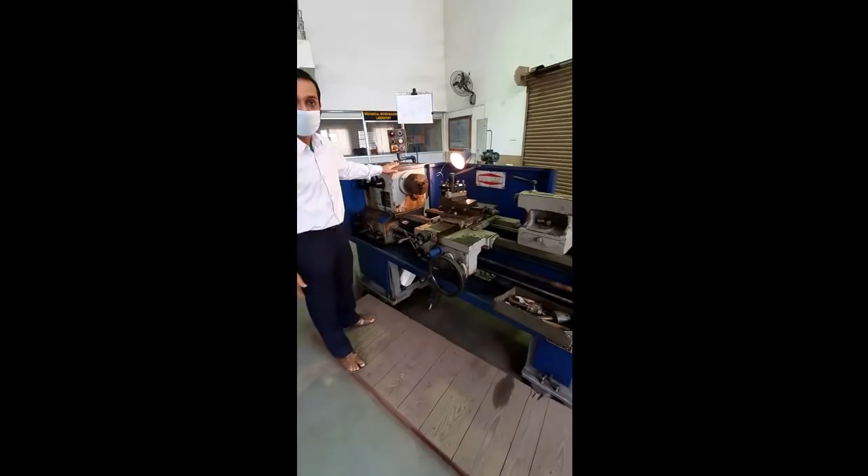Hi everyone, now we come to the introduction of lathe machine. Lathe is a machine tool, and this is what the full lathe machine looks like.

Now this lathe machine has 6 important parts. This whole part is called the headstock. It comprises of some gears and the chuck.

This is the tool post where the tool is mounted, which is used to cut the job. The tool post which has been provided can fix 4 tools at a time. Now you can see 2 tools are being held at this tool post, while the tool post can rotate like this to bring the required tool forward, based on the operation.

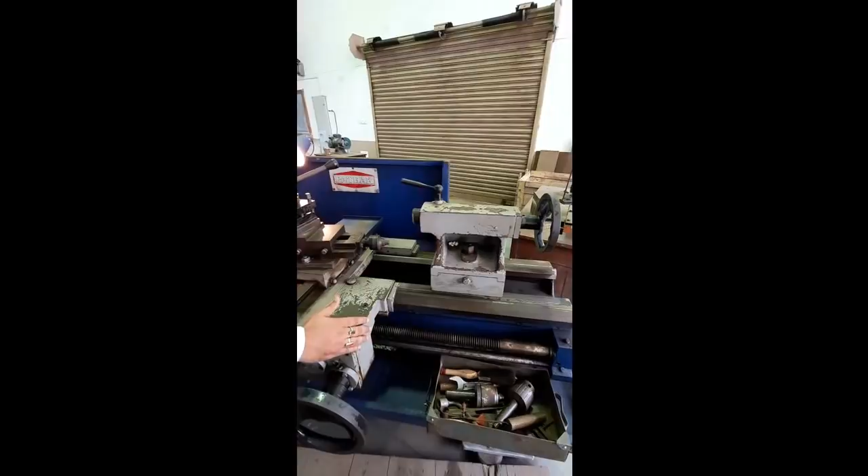Now this is the tailstock, and this is called the carriage. This carriage is used to move the whole assembled tool post and other things forward and reverse. This is the bed of the machine, and here is the feed rod and this is the lead screw. These are the important parts of the lathe machine.

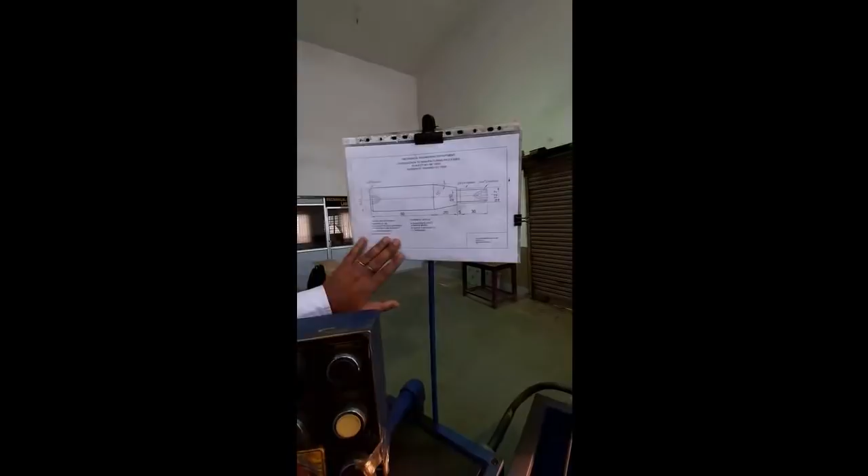Now this is the job which we have to do on this lathe machine. It comprises of facing operation first. The first is facing, then it's centering. Centering means there is a center drill which is used to drill the face. Then turning means removal of the material through the upper surface.

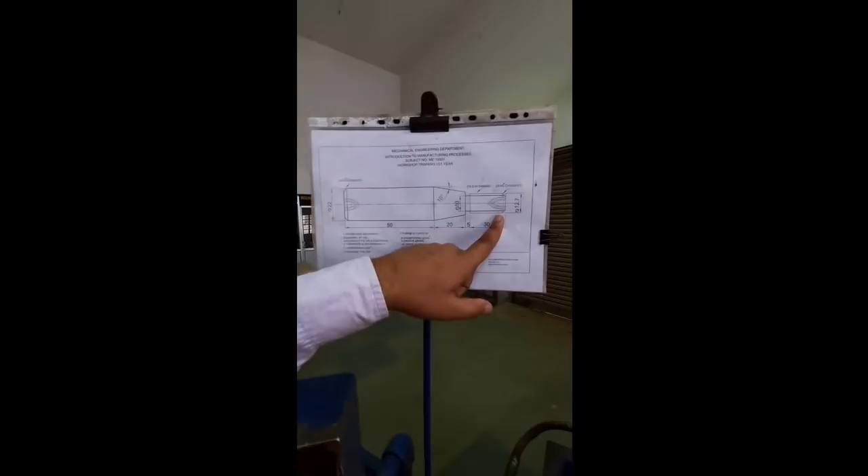Chamfering is the cutting of the edges. Then we have another turning over here, then chamfering again. Then we have the groove which is used to make a collar inside the job. Then taper turning - you can see it is not a cylindrical job, it's a conical job with a round circumference over it. This is called taper turning, and over it threading has to be done.

Now we can see the total length of the job: 50 plus 20 is 70, plus 5 is 75, plus 30 is 105. And the maximum diameter of the job is 22.

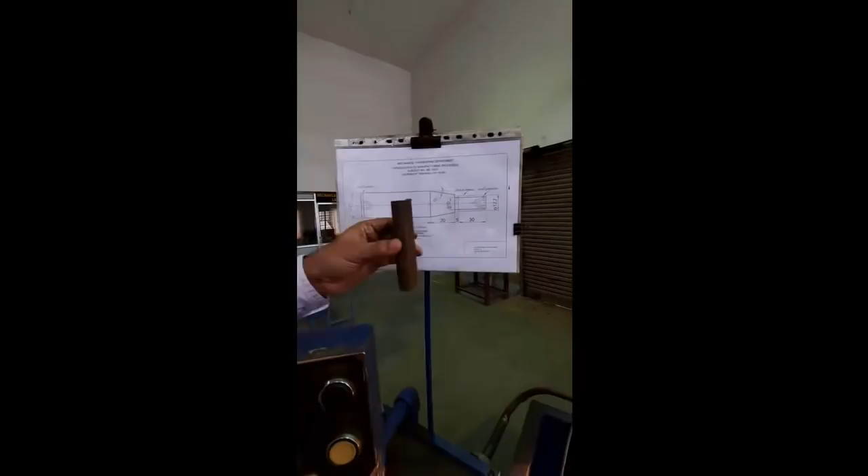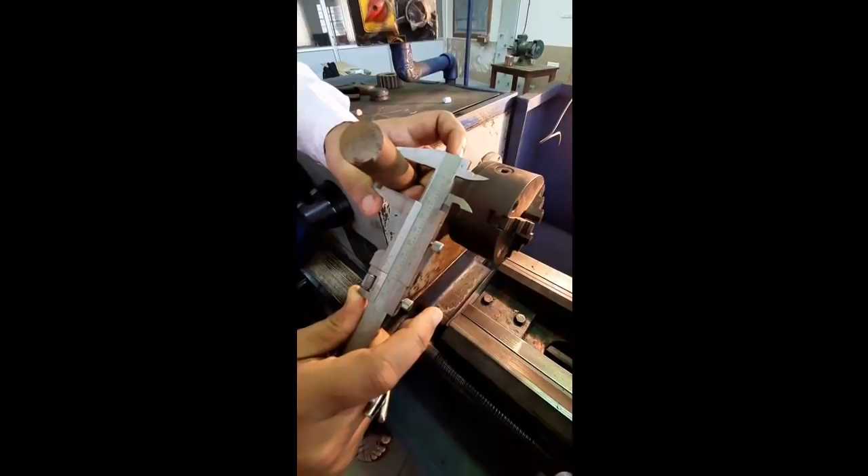So you have been provided with this raw job which has to be given this shape. First of all, we have to check the diameter of the job. We put it into the vernier, we can see the job diameter is 25. So a 25 job diameter will do, because as the maximum diameter of the job is 22, we minimum require it should be more than 1mm or 2mm than the maximum job diameter. 25 is 3mm more than required, so this job is fine.

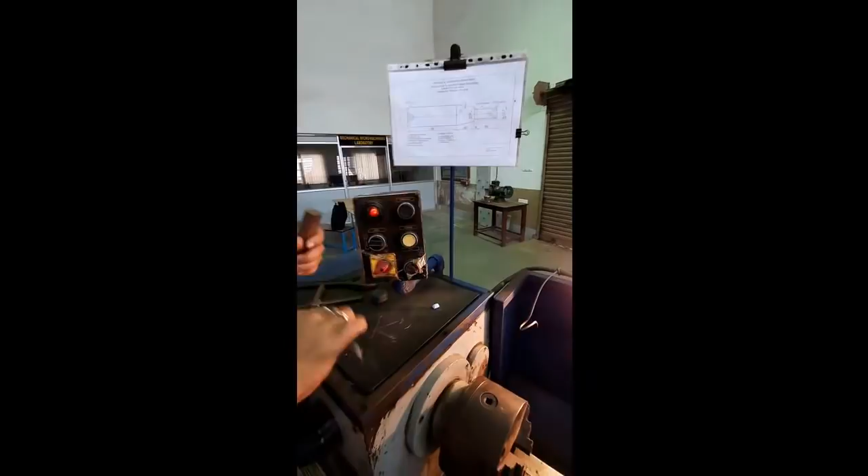Now the length of the job, it's 105 in the finished product. So here we see the length of the job. The raw job length is 109, so it is also more than 105. So this job is suitable for making this product.

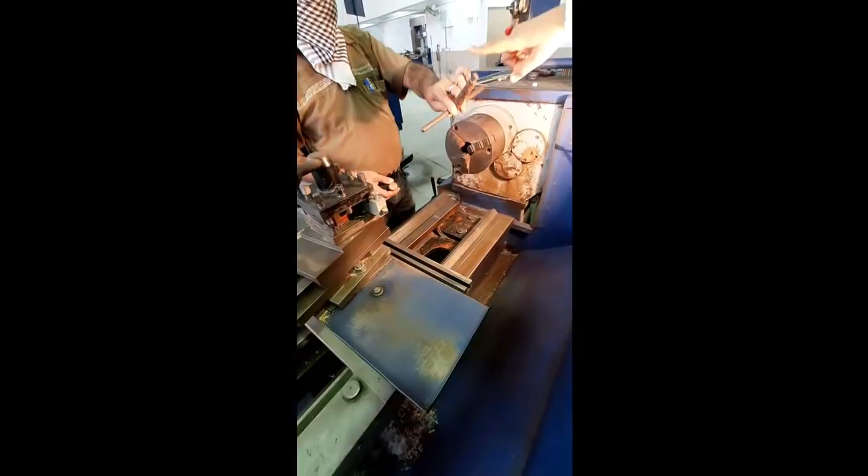Now we can see this is the chuck key, and the job is being fitted inside the 3-jaw self-centering chuck by using the chuck key, and we are making it tight.

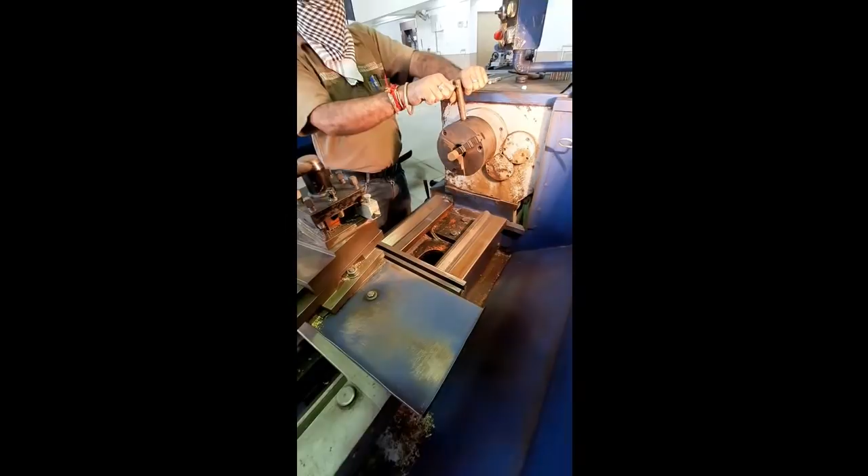Now this is the tool post. We have to do the facing operation. The tool is being indexed to a 45-degree angle, and to perform facing, the cross slide will be used. By rotating the cross slide, we can move the tool post forward and backward. There is another wheel used to move the tool post to and fro, used to remove material over the surface. The cross slide is used to remove material through the facing plane, perpendicular to the job.

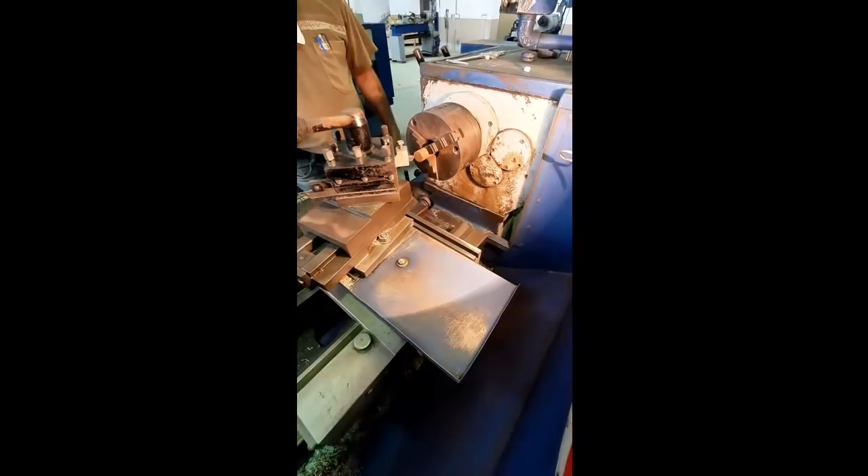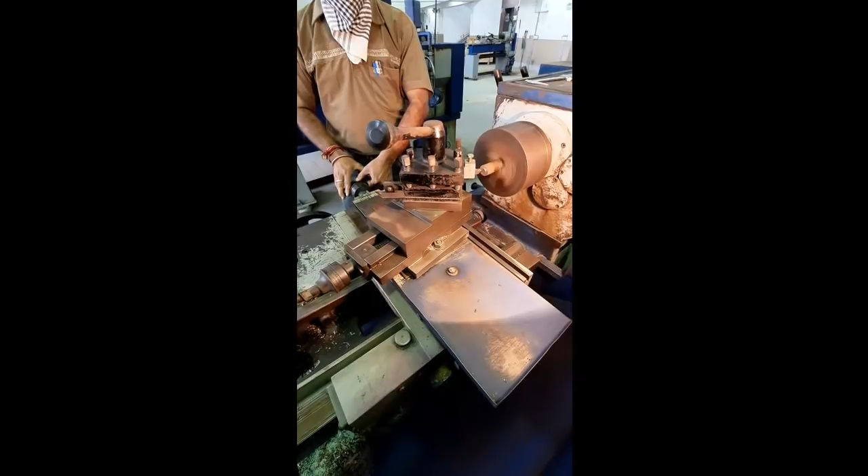Now we are going to see the facing operation. Taking the touching point, you can see the material is being removed through the face by rotating the cross slide. The cross slide is being moved, and at the point of action you can see the tool coming close and slowly removing the material.

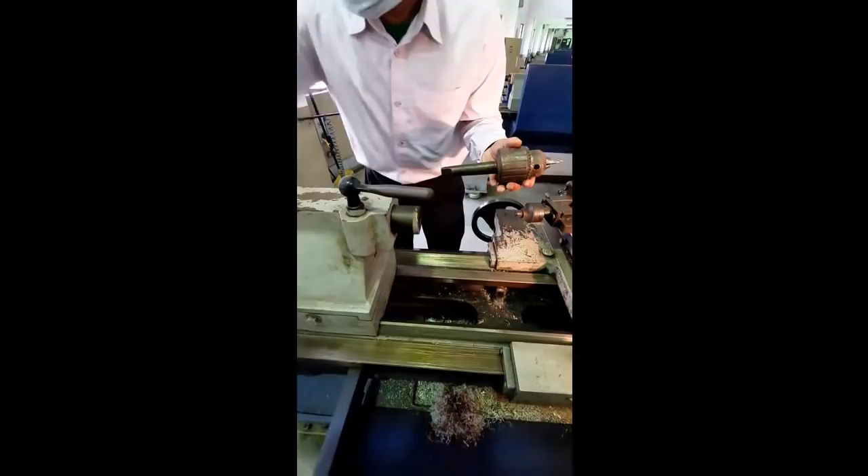This is a 3-jaw self-centering chuck where a combination drill bit has been attached. It is used to make the centering operation on this face. For this we have to move this wheel to take out the barrel. After taking out the barrel to some extent, we put it forcefully and press fit the job. Now we slowly slide it towards the job, and after that there is a nut over here which we have to lock.

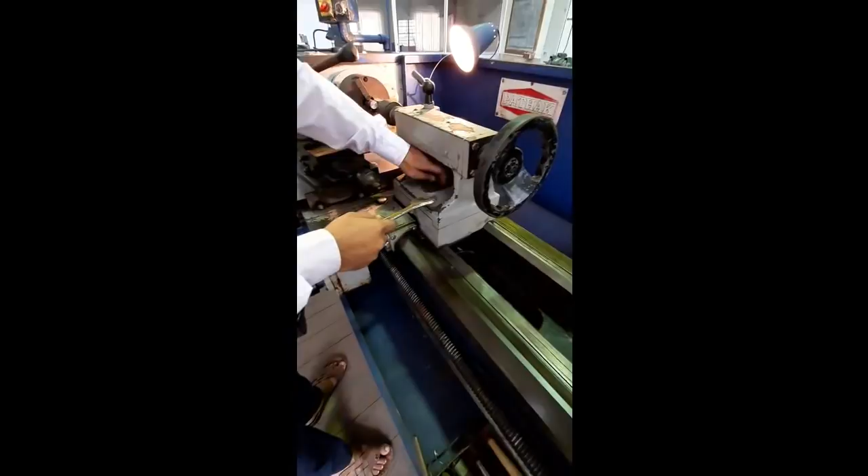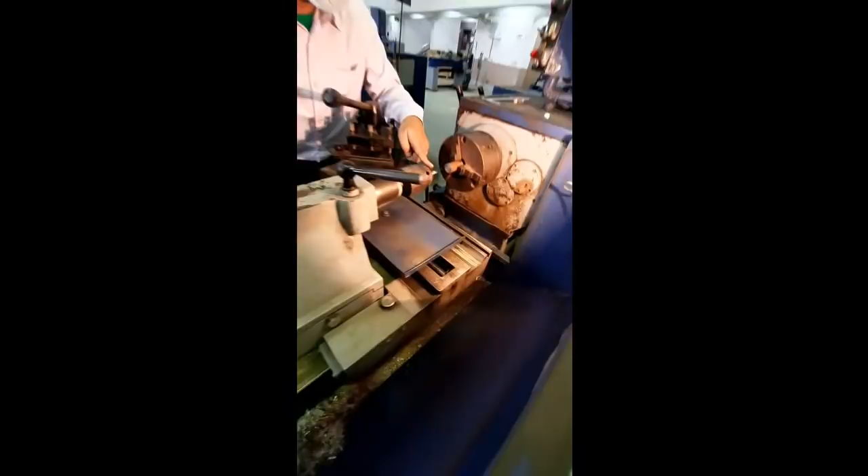Now from here we are making the drill onto this job. One thing to note: the job will rotate, the drill bit will remain stationary. In normal drilling, the drill bit rotates and the job remains stationary.

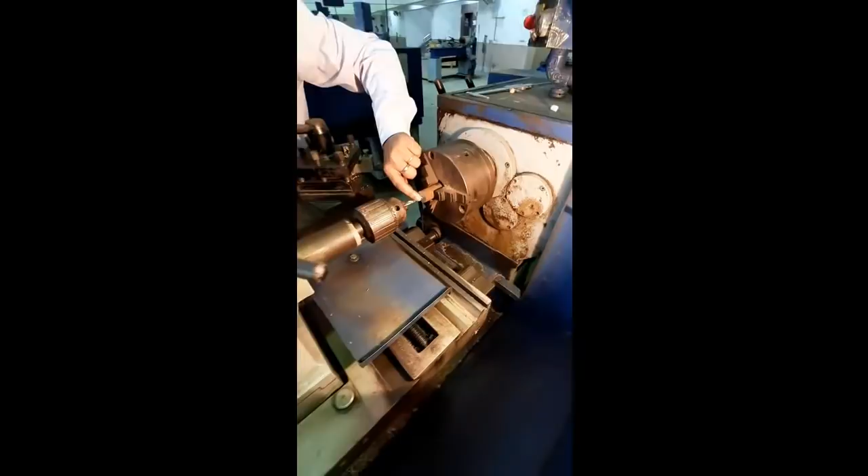Now we can see the drill is being done. At least half of the conical shape of this drill should go inside. We can see the tapering impression of the conical face is found here.

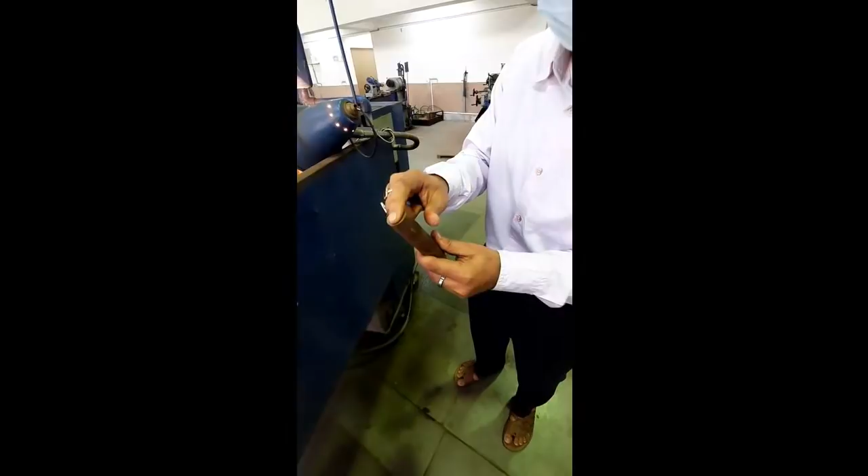Now we can see the facing and centering is being done. The opposite side is still being rough. The total length of the job required after finishing is 105, but we have found it was more than 105. So for finishing the face opposite to that, we use chalk to mark it.

Now we take the job and come to this table. We find a point indenter which has been set to 105 mm. If it is not clear, it's still being shown here. You can see it has been set to 105 mm, not 110 or 100.

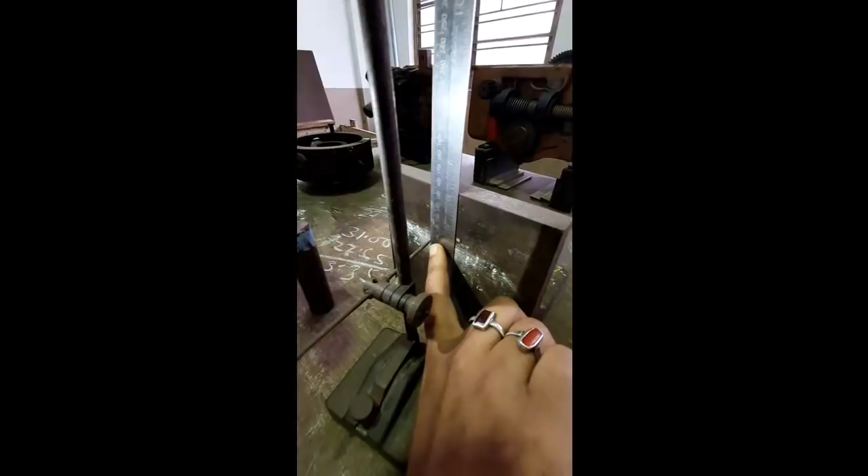Once this has been set, we remove the scale and place the job in this area, and slowly rotate the job using this indenting head or marking block. The name of the instrument is marking gauge.

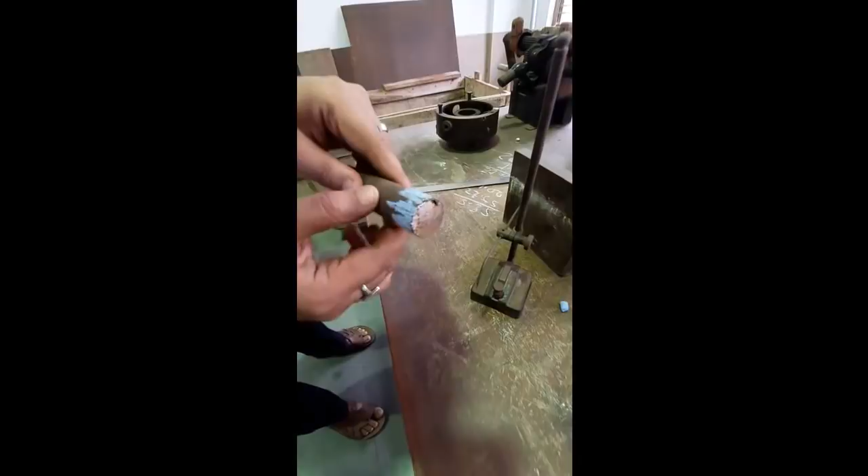Once we rotate it, we can find a small line has been drawn. That means from here to this face, we have to make the facing operation. This total instrument is called the marking gauge.

Now we can see the opposite face of the job is being marked with chalk, and the marking is being done up to where we have to face it. The facing operation will be the same.

Now we have to face it. As the thickness may be a little bit high, we have to do it in 2 or 3 passes. So the touching point is taken, then pulled back, and a little depth is given. Now you can see the facing operation is being repeated on the other side.

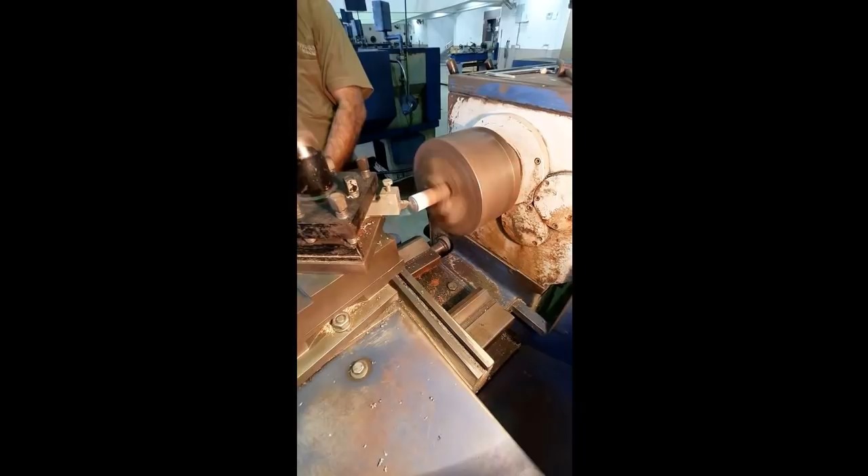Next, again the facing and centering operation is repeated on the other side. The drill bit is again fixed inside the tailstock. It is brought close, then the nut seen in the previous operation is tightened, and the centering operation follows.

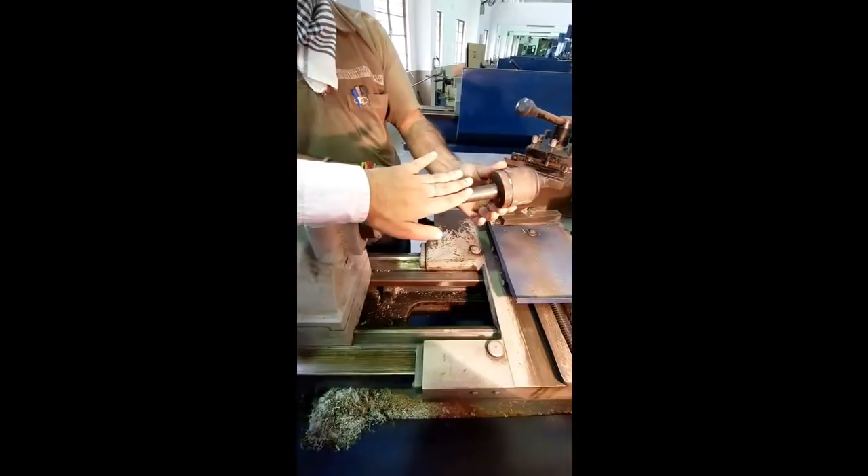This is called a revolving center. You can see it is conical in shape and the center revolves. Now it will be fixed inside the tailstock.

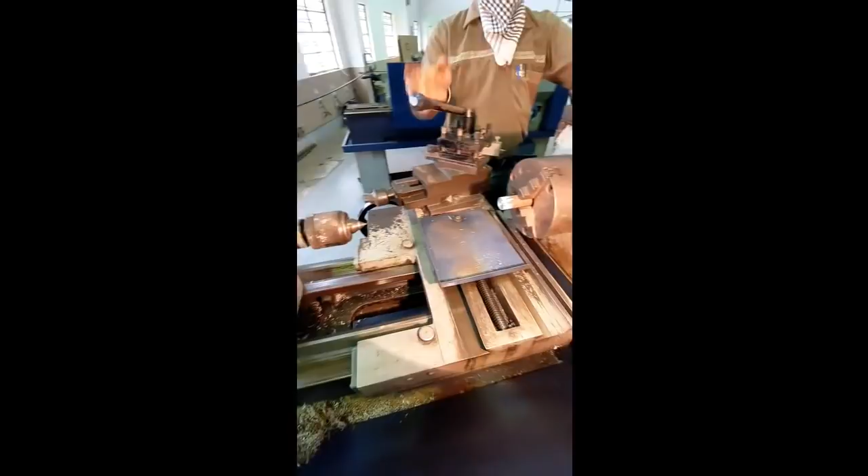Once it has been fixed in the tailstock, we go to the next operation, called turning. Now you can see for turning, we have to remove material over this face, so the job will be kept in a hanging position.

This revolving center is attached with the centering of the job. This is because it gives support to the job while in hanging position, so that the job doesn't rotate eccentrically while the material is being cut.

Now we are ready to do the turning operation. You can see the tool post is being made straight and it will touch this periphery. There we get the reference point, and from there we have to move 3 mm in diameter, because the diameter of the job is 25 and we have to reduce it to 22. So 3 mm of diameter will be removed in 2 or 3 passes.

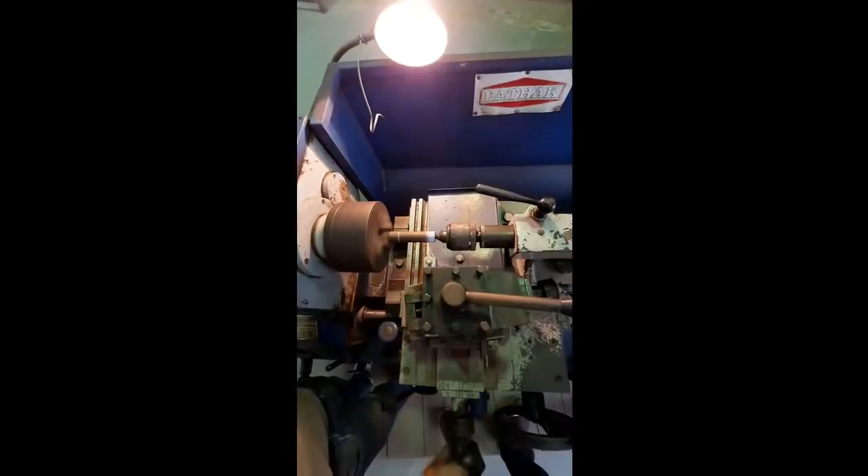So we are ready to do the turning operation. Now we are going to see the touching point of the tool with the job. So the tool has touched the job, we take it outside.

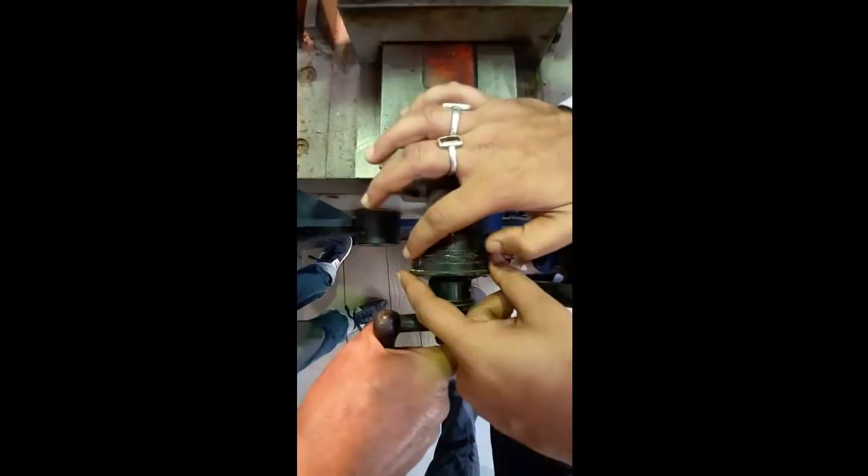Once the touching point is found, we take the 00 marking as reference. Now there is a scale over here. We rotate the scale without disturbing this handle. The scale is being rotated and touched to 00.

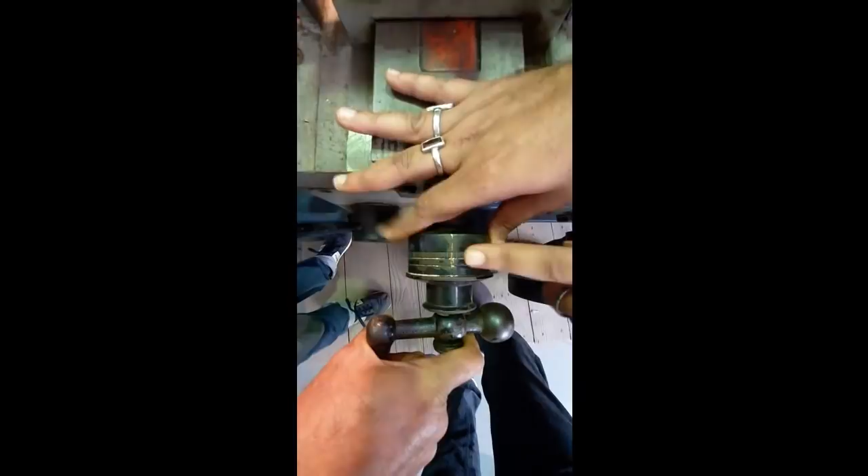So the tool is right now at a position where it can make a diameter of 25, because this is 25. The tool is at a point where, if moved to and fro, it will be touching the 25 diameter. So it can make 25.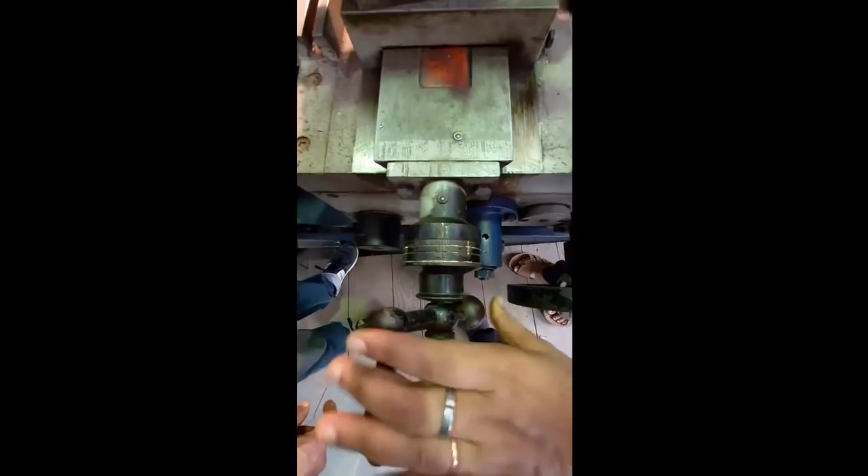Now, once it has been set to 0, we move it clockwise 10 divisions. The tool post moves 0.5 mm forward, hence it reduces the diameter by 1 mm. So the least count of this scale is 0.1 mm per division in reducing the diameter, and 0.05 mm per division to reduce the radius.

Now we are going to start the turning operation. It is used to reduce the diameter. You can slowly see a silver cylindrical surface emerge as the tool passes the job piece. 1 mm is being shortened, meaning from 25, the diameter now being evolved is 24 mm.

Now we can see the final cut after 2 passes. This is the third pass. We are reducing the diameter by 1 mm, so 25 to 24, then to 23. Now we are going to 22.

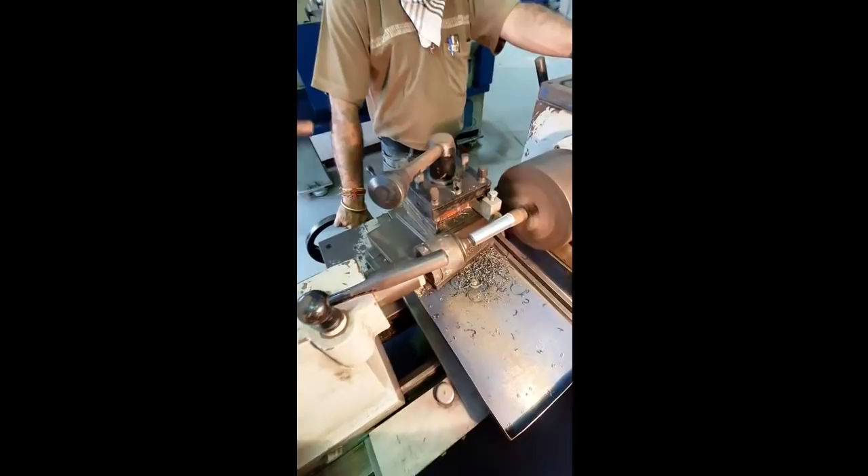We are rotating the wheel very slowly so that the tool goes very slowly over the surface to get a finished surface at 22. The diameter which is evolving is at 22. Now we stop the turning operation.

Now we can see at 22 we have turned more than 50 mm. From this part to this we have to mark 50.

For this reason we take a scale. See, the 10, 20, 30, 40, 50, 60 are given. This is called an engineering scale. Here this end resembles 0.

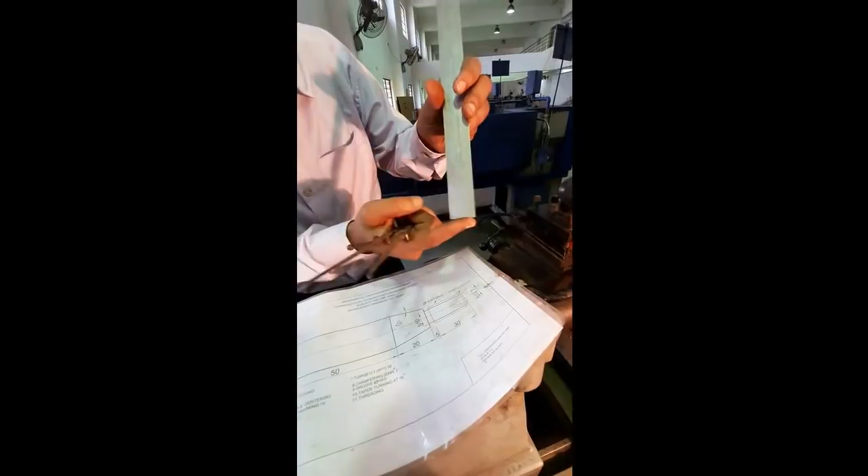So to mark 50, we put it on a plane surface. Then we put this caliper and see whether one end is at 0 and the other at 50 or not. Once it has been set to 50, we lock it, then slowly we make a marking on this face.

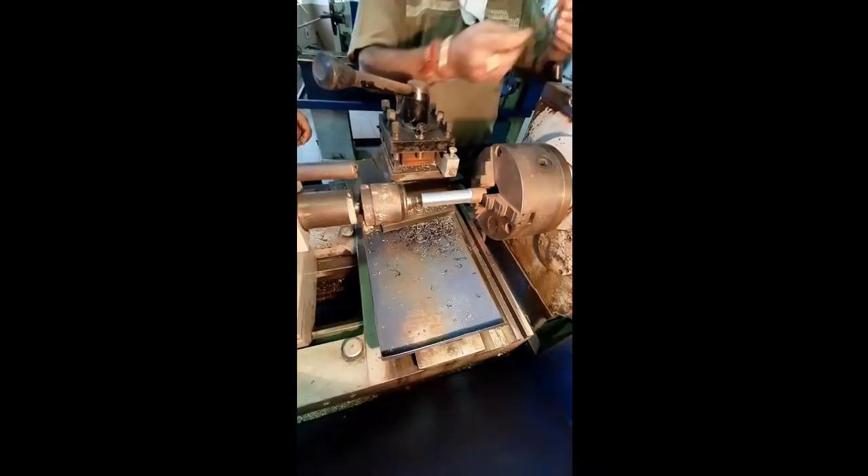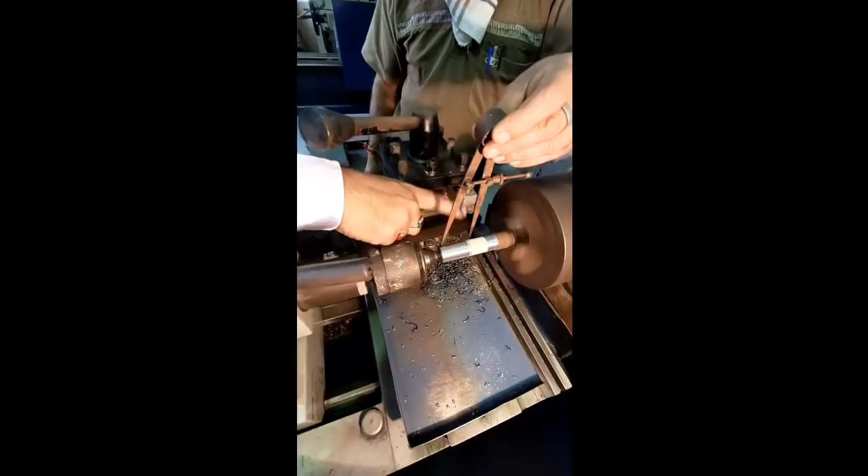So right now we are going to mark 50 on the job. The inside caliper, one end should be at this end of the job, the other end should be at the tip of the job. We have marked a chalk mark over here so that when the tip of the job makes an engrave or impression, it can make a silver lining. So we have marked a chalk for the marking system.

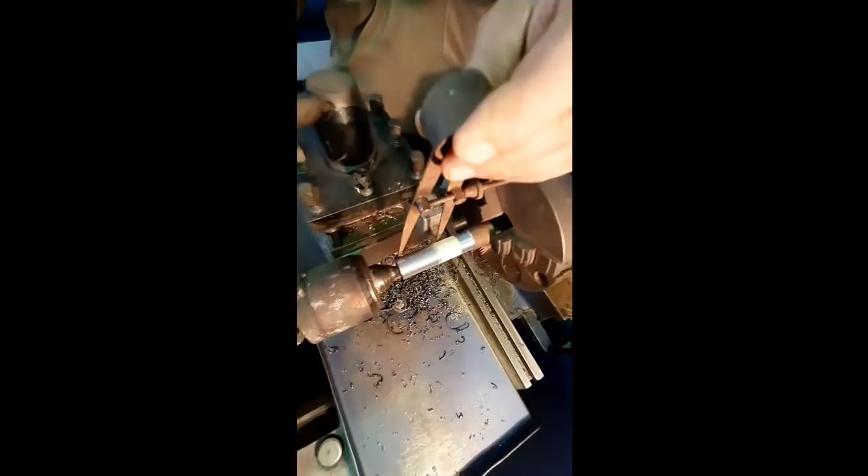We make the tool move close to the job and place the tool head at one end of this inside caliper. Once it has been set, now we make a marking by rotating the cross slide and just touching the tool with the job.

You can see this is 50. 70 to 50.

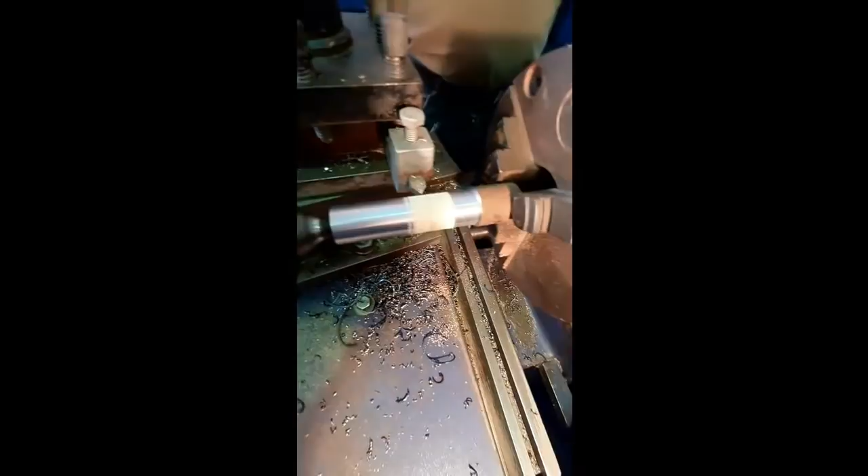Now, once the 50 has been marked, we have to mark it at 50 plus 20, that is at 70 also. For that, we again take the scale and see it is not at 70. We slowly, by revolving the screw, get it to 70.

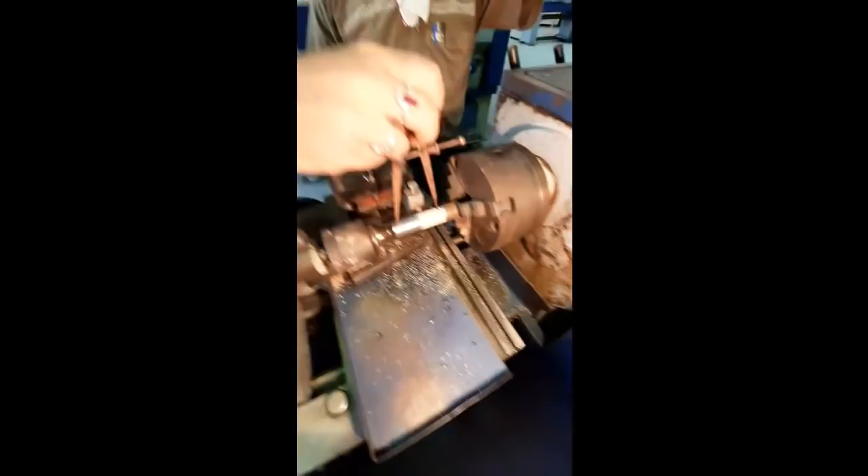Now it has reached 70. The same operation will be repeated by placing the inside caliper over here, the other face of the caliper over the tool, and we have to mark it.

Now we are marking at 70. You can see a silver line is being formed which marks the 70.

Now after both markings given here, we have to make the chamfering operation at the end. It is 45 degree, 2 into 45 degree. That means once it touches, the diameter formed after the chamfering operation should be 20.

This maximum diameter is 22, so to reduce 2 from this 22 will give 20, and the angle by which the chamfering will be done is 45. You can see the tool is rotated by loosening the screw. This face has to be at 45 degrees while touching this edge so that the chamfering can be done.

So 2 mm has been reduced, you can see the chamfering.

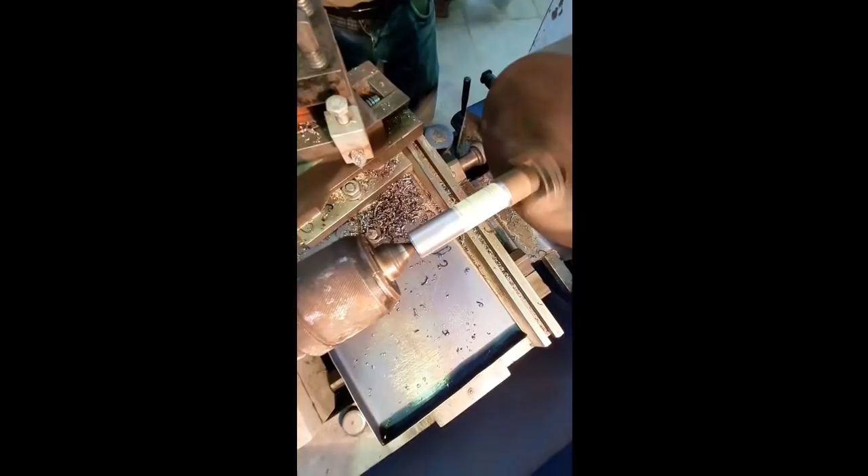Next, we will reverse the whole job orientation. Now, by loosening this, we are taking out the job and will fix it in reverse. The revolving center is again used to support the job, and the operation will be done on this face.

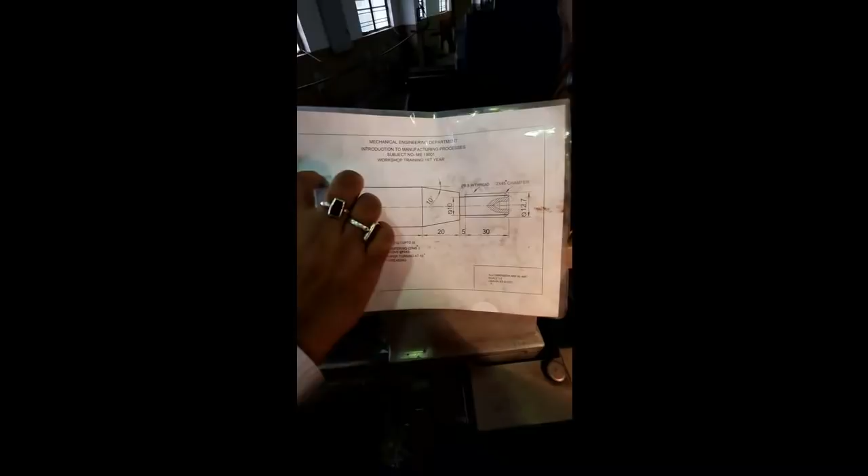Now, as we have reversed the job, this part is under the chuck grip, and this part is on which we are going to operate.

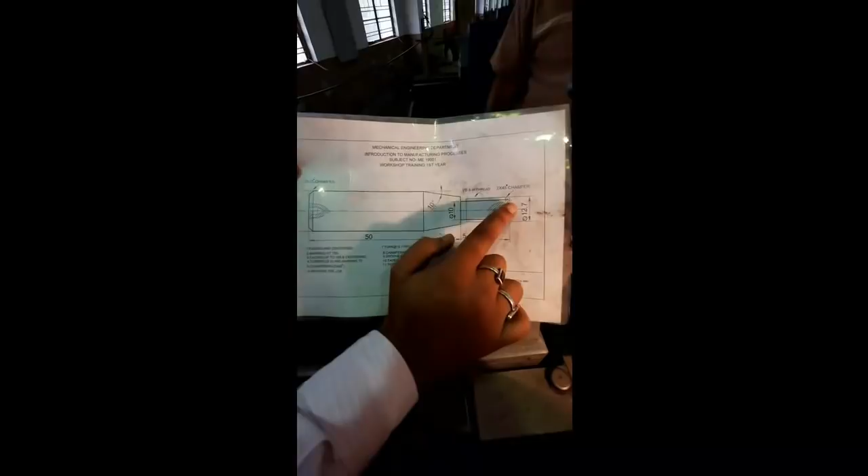So here the next diameter which is being formed has to be 12.7. Hence from the 25 raw job diameter, we have to reduce it to 12.7, meaning 12.3 mm of diameter has to be removed. If you calculate on that cross slide scale, you have to rotate 123 divisions part by part so that we can achieve 12.7.

Now again the 00 marking is being taken over here. Once it is taken, it will be done in 5 or 6 passes. Suppose we take 6 passes, we will use 20 or 25 divisions at a time, move 4 passes and another 23 divisions last pass, which will give up to 123 divisions.

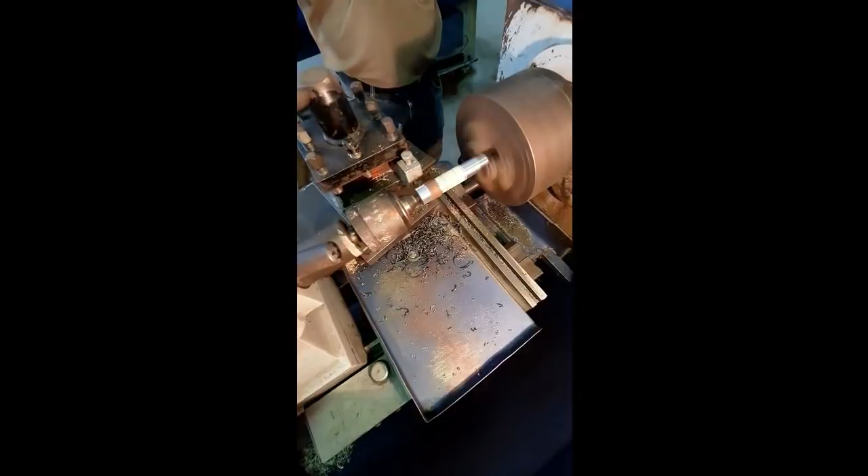Now we can see the turning operation has started. Here the diameter going to form will be much lower than 22. This is also called the step turning process. Once the big diameter is done, the next diameter is small. Here we are starting step turning, and the diameter we are going to achieve is 12.7 mm.

Now we can see a small diameter is being formed after the big one. The small diameter is 12.7, and this is the final cut done with a small depth of cut and slowly rotating the wheel. This is done up to the 70 mark which was marked from that side.

Chamfering of this end has to be done. See, the operation is going over here. The chamfering is done.

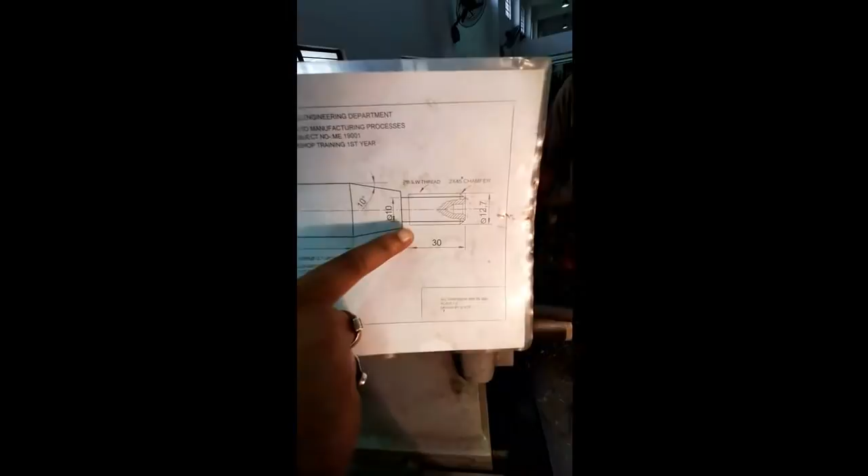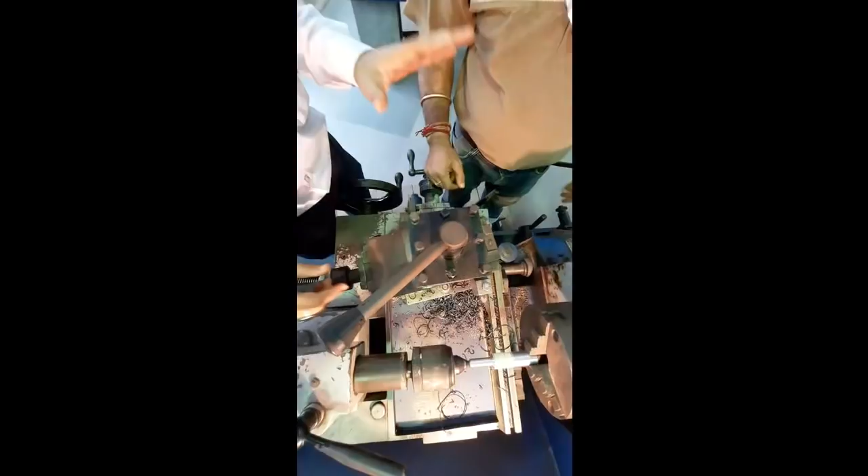The chamfering is done. After this, we will go for the operation called grooving. This collar, which has a 10 diameter, the grooving will be done 30 mm from this end, with a width of 5, to a diameter of 10.

Now for the grooving operation, this is the turning tool. We have the groove tool fixed on this end, so we have to take this groove tool over there. For that, we loosen this screw and rotate the tool post. This is the groove tool coming into the line of action.

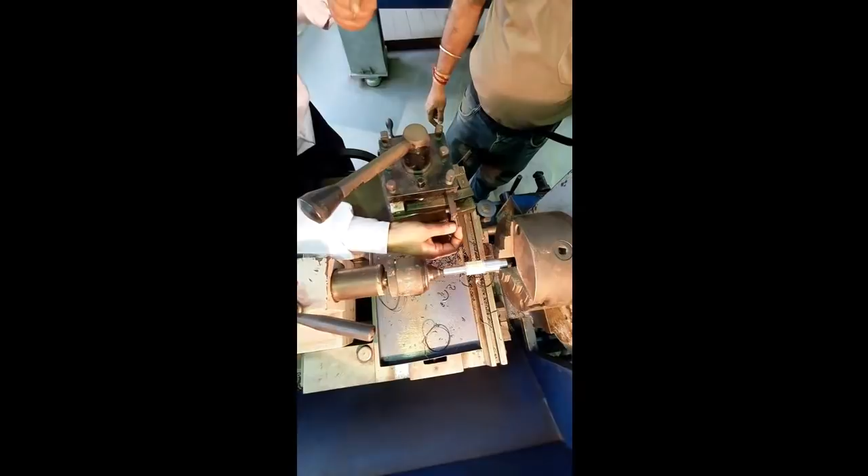This groove tool has a depth of 2 mm. It cuts perpendicularly straight in, and has a width of 2 mm. The width of the groove is 5, so we have to go twice or 2.5 times with the tool, this way or round way, to get the groove.

Now, while the turning operation was done, you can see at this end the surface is a little tapered. We use the groove tool to make this tapered surface perpendicular or straight. Once we made it straight, we will go inside from the job diameter of 12.7 to get it to 10.

We can see the surface which is coming out is straight or perpendicular.

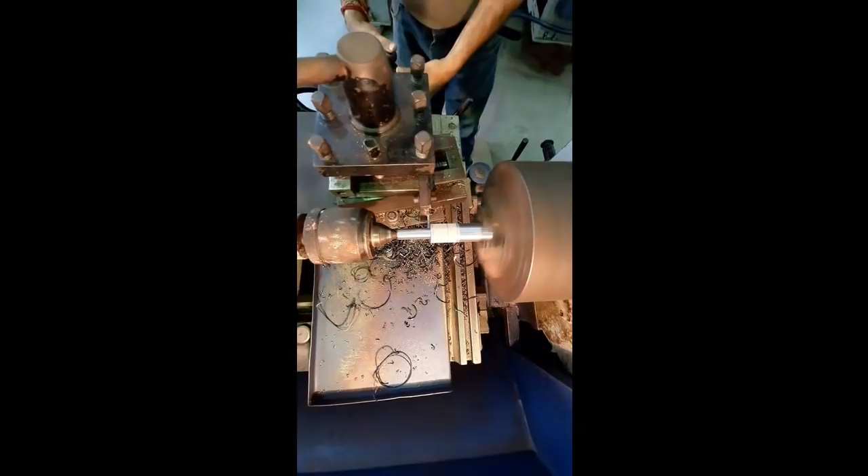The groove tool is rotating on a diameter of 12.7. From here we have to go to 10, which means we have to reduce by 27 divisions. So 27 divisions into 0.1 gives us 2.7 mm, which is the reduction in diameter required.

A small incremental depth of cut of 5 divisions, that is 0.5 mm reduction of diameter, is given, and the tool is moved to and fro. Like that, we have to go to 27.

You can see the collar has started forming. Slowly we will go inside and we will move the tool to and fro.

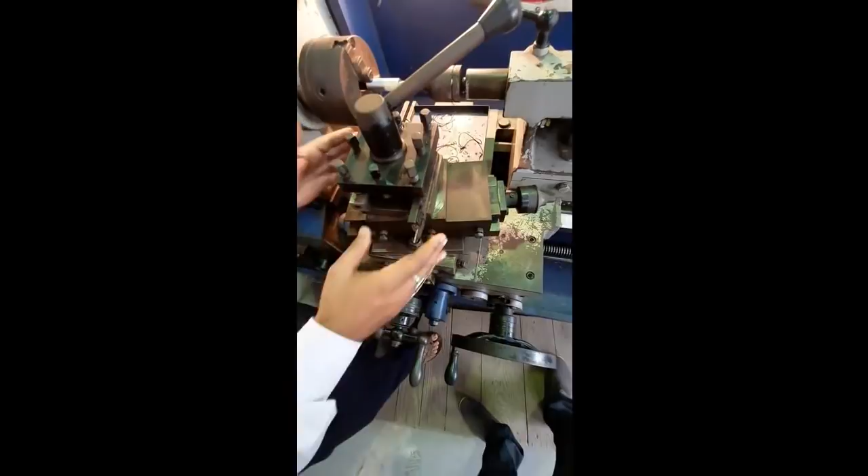We can see the collar is being formed. Now the next step is to make the taper turning on this 20 mm length with an angle of 10 degrees. For that reason, we have to again come to this tool post, swivel the tool, and get the turning tool back in the line of action.

Once it has been put in the line of action, on this tool post, see there is a nut over here, and a similar nut just opposite to this. We have opened this and rotated the tool post to 10 degrees. You can see 0 and this marking is at 10 degrees, so the angle the tool post is forming right now is 10 degrees.

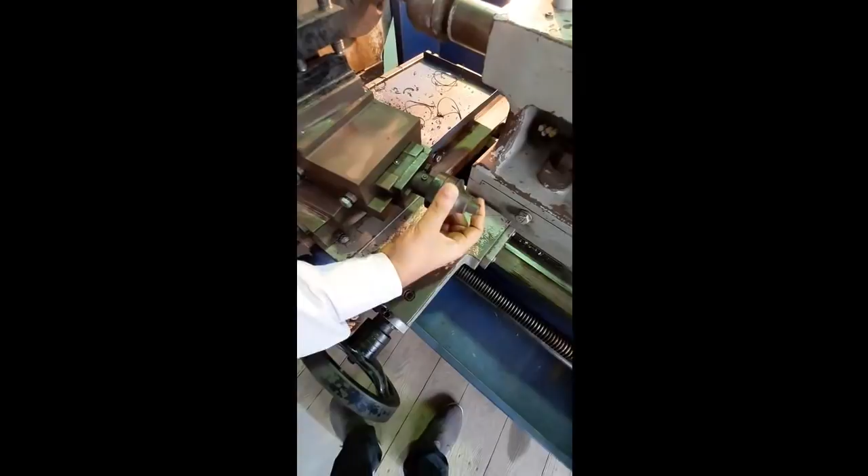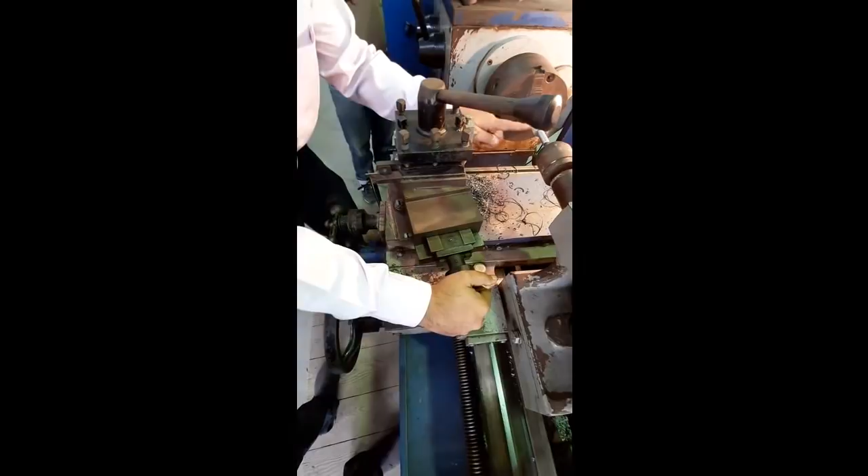The whole thing is controlled by this compound slide. We can see if we rotate the compound slide through this handle, the tool post revolves or moves on a 10 degree angular form with the base. Hence, by rotating this compound slide and engaging the tool on the job, we can get a 10 degree cut.

We have to get the taper from this line to this line, but we will start somewhere down here, because as the tool moves in a triangular form towards the lower surface, at this point the chip removal will be much higher. To reduce that chip load at the last point,

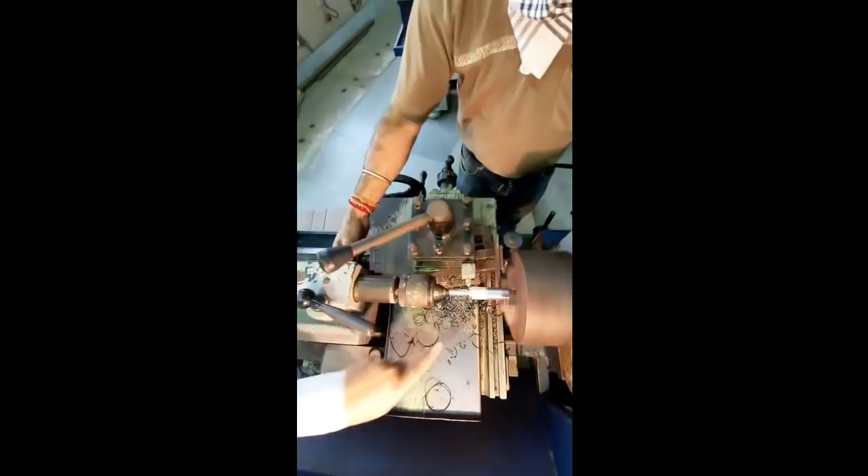we will be doing it part by part, and at last we have to touch this line, which is the 50 line from that end, and go slowly downward to get the taper. You can see the compound slide is being controlled from this end, and the tool is moving along the 10-degree axis.

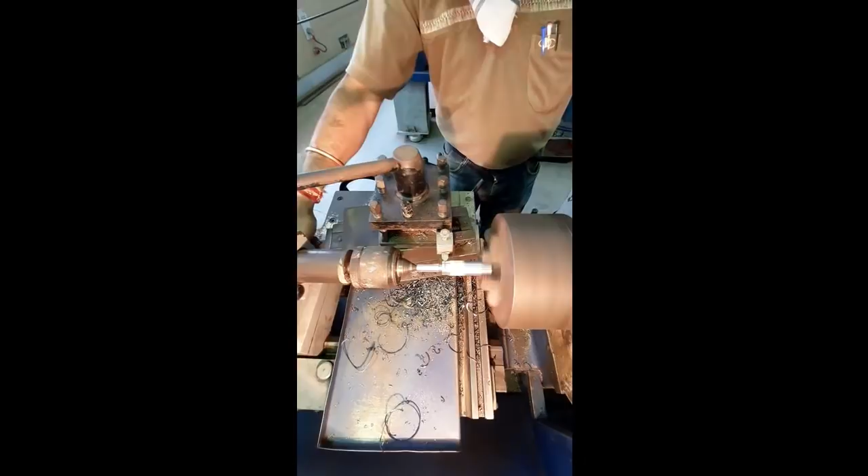Now we can see the final pass of the taper turning has started.

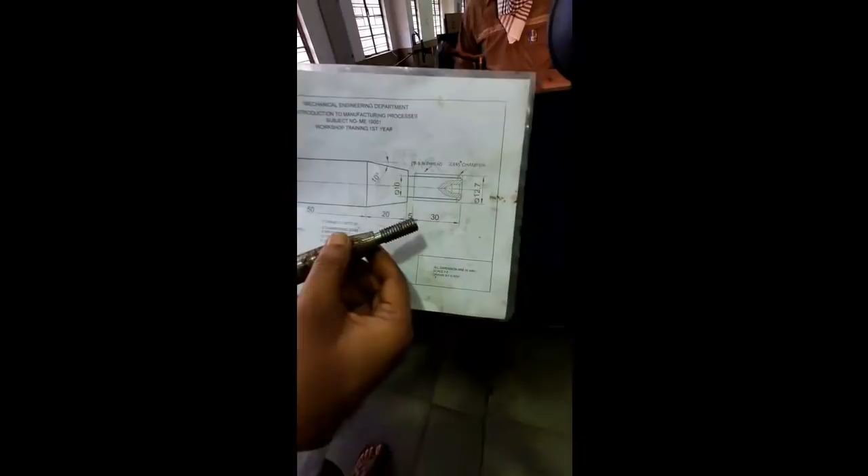Once we finish the taper turning, the last and important operation we are going to see is the half-inch BSW thread on the diameter 12.7.

We have made it 12.7, meaning half-inch BSW thread. Half-inch means half of an inch, which is 12.7, that is 25.4 divided by 2. So that is the half-inch diameter.

And BSW thread, you can see a finished product which we have already made earlier. So this is the thread which is going to be formed.

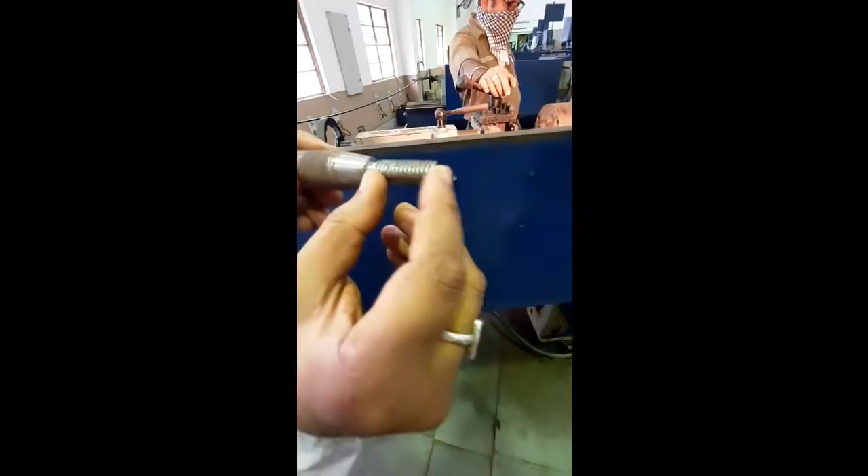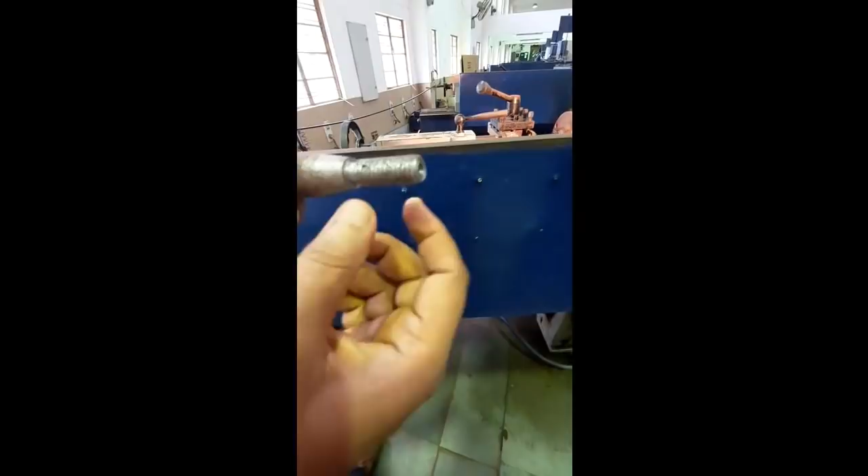Now, the number of threads that is going to be formed in an inch in a half-inch BSW thread is 12. So 1 by 12 is the pitch of this thread. Here you can see the thread, it has a peak form and a lower form; it is like a triangular shape.

So the depth up to which we have to make an impression comes from the formula of 0.6403 into pitch, which is 1 by 12 into 25.4, because it is done in millimeters and half inch.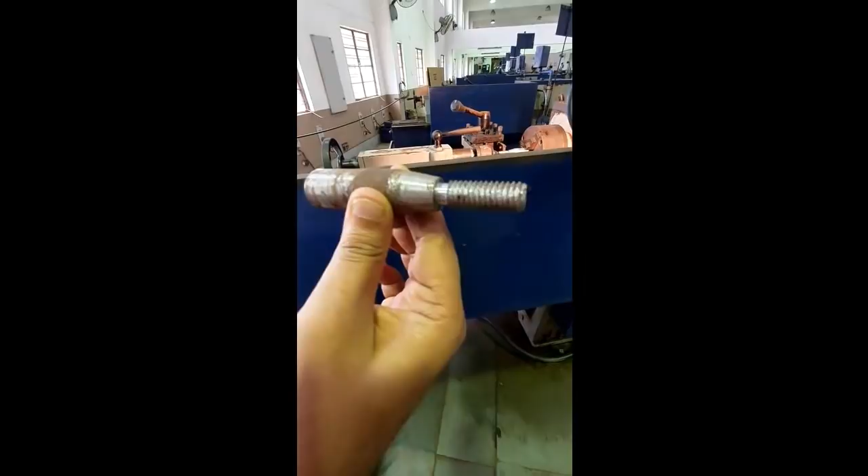So we are converting from inch to millimeter. That's why we are using 25.4. We multiply by the factor, which comes to 1.35. That means the depth from top to bottom should be 1.35.

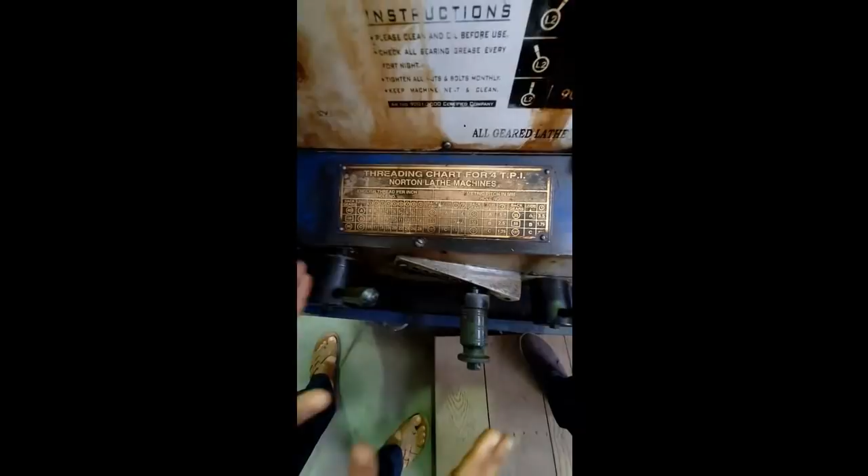So here a thread chart has been given. Actually the machine has a combination of gears and other things to make threads, and here the combinations are being given.

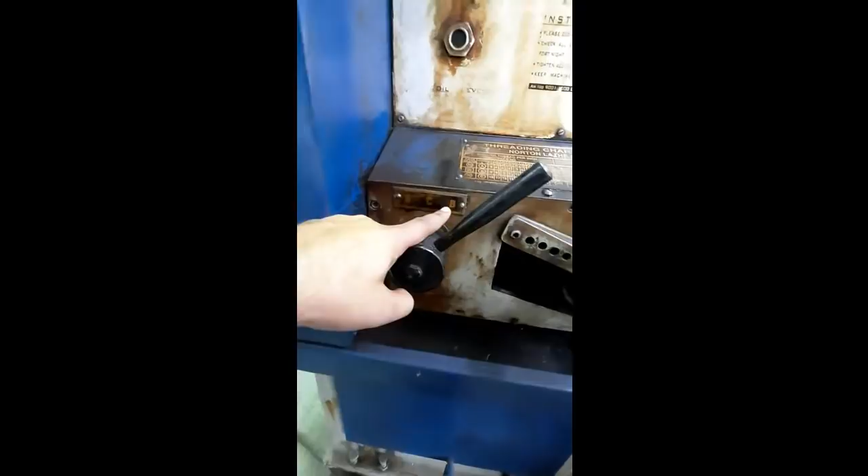As you can see, the thread per inch for half inch BSW thread is 12. Here 12 is at lever B, so we can see the lever has to be at B, and the hole is the 7th hole. While putting the lever at B, it has to be at the 7th hole.

You can see the number of holes being formed here: 1, 2, 3, 4, 5, 6, 7. See here the pin has been attached to the 7th hole. Now the tumbler lever is being attached to the 7th hole.

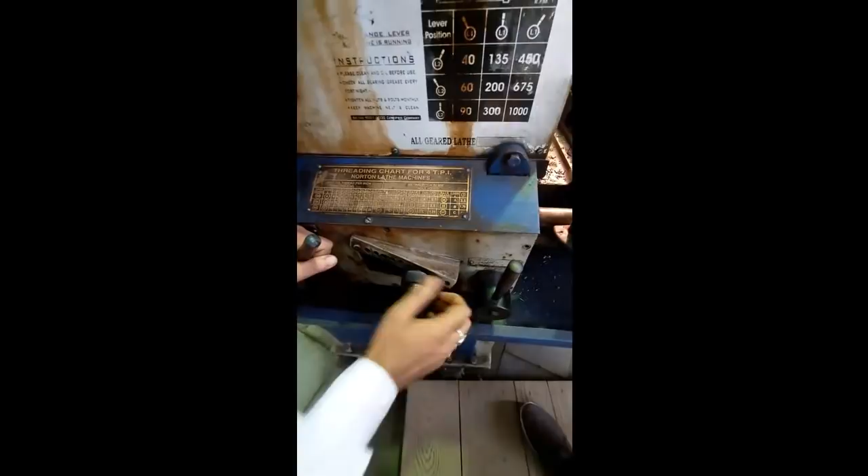While doing that, now we come to the main important thing, which is called the half nut mechanism. Actually, the thread is formed because the tool moves at a certain distance per rotation of the job, and this is controlled by the feed rod and the lead screw.

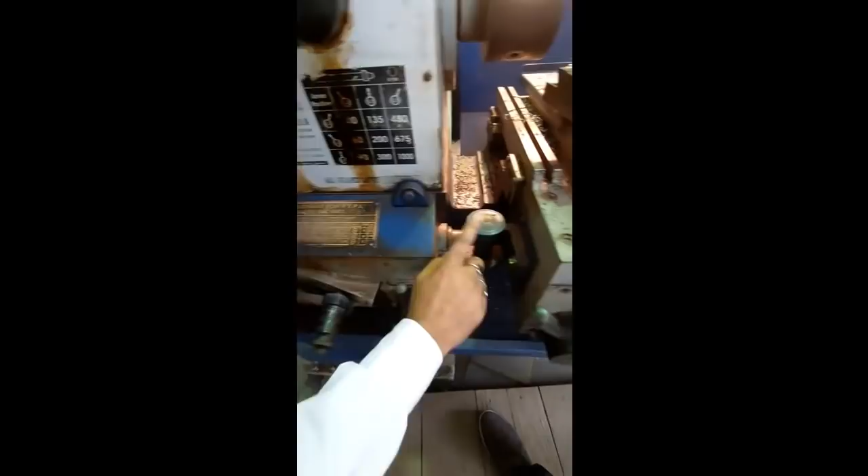Here the half nut mechanism is there. While we engage the half nut mechanism using this lever, the half nut engages over the lead screw. We are going to see the half nut mechanism now.

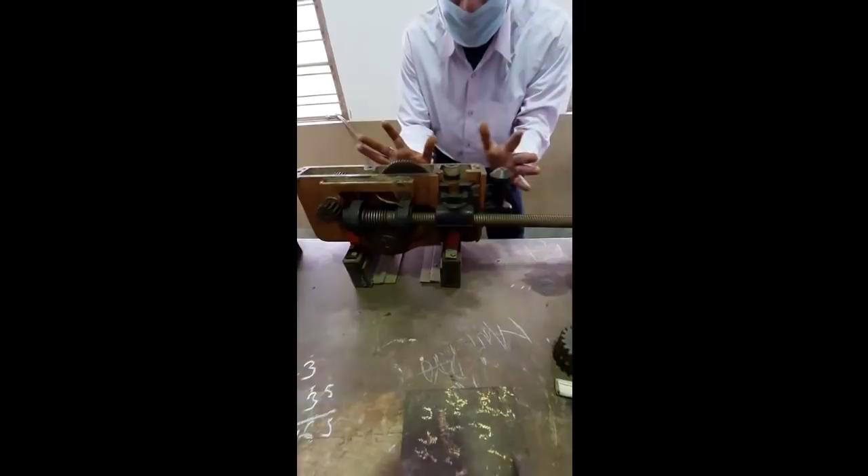Actually, in this lathe we are seeing it from this end. The half nut is just opposite to this apron. So this is called the half nut. You can see two cylindrical surfaces being apart, and here the threads are being formed.

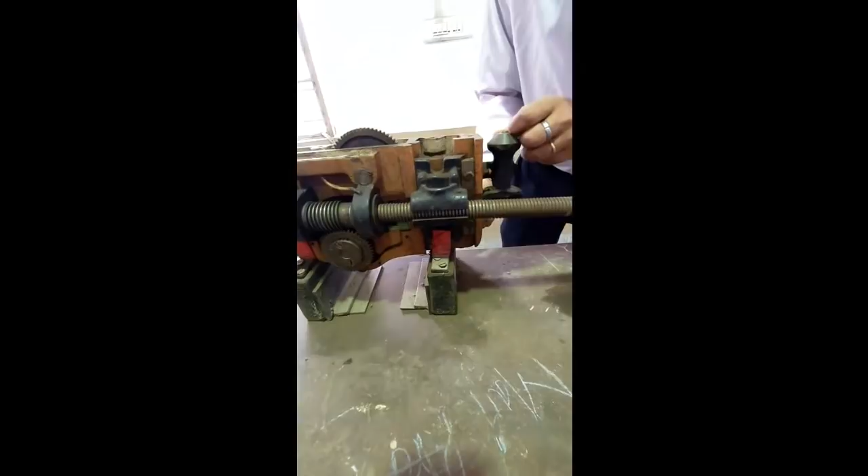Suppose this is the lead screw. While we engage the half nut system, the two jaws, the two half cylinder jaws, actually engage on the lead screw. We move the half nut lever upward.

You can see it has engaged. Whilst we move it down, it is disengaging. Again, we move it up, the engagement is done, and while we move it down, the disengagement starts.

Actually, this lead screw rotates at a particular synchronized speed. Whilst we engage the half nut mechanism, with the rotation of this, some threads move this whole carriage to and fro with a synchronous speed with the chuck to help form the threads.

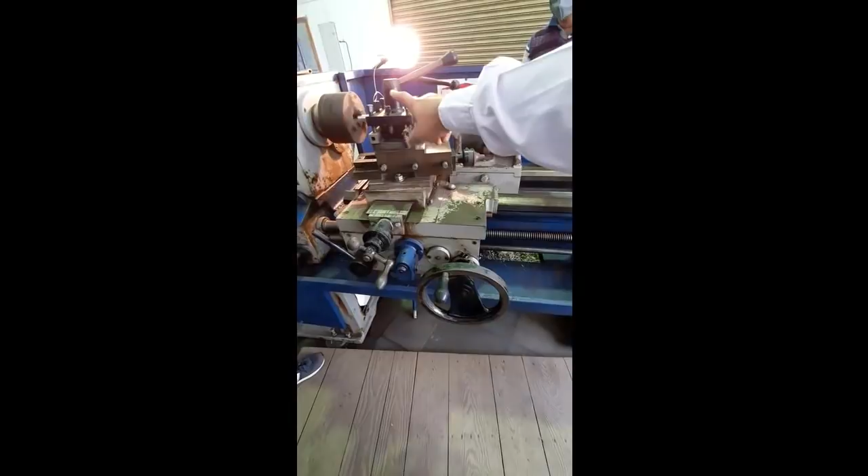We have made the machine ready for the threading operation. The first major change we can see is the rotation of the job, which is much slower than the previous operations. Here the operation is very delicate, so we have to do it at a very slow speed.

Once it has been seen, you can see the lead screw has started rotating. Now, if we engage the half nut, you can see the tool post or carriage is moving. If we disengage the half nut, please disengage. You see the lead screw is moving, but the carriage is not moving. So this is the function of the half nut mechanism while cutting the thread.

So we are starting the threading operation. We have taken the touching point, and a little bit of depth of cut is being done. 1.35 is the total depth of cut. We will do it in at least 2 passes, minimum 2, maximum 4 passes. So we are giving 0.6 mm at a time, and starting the threading operation.

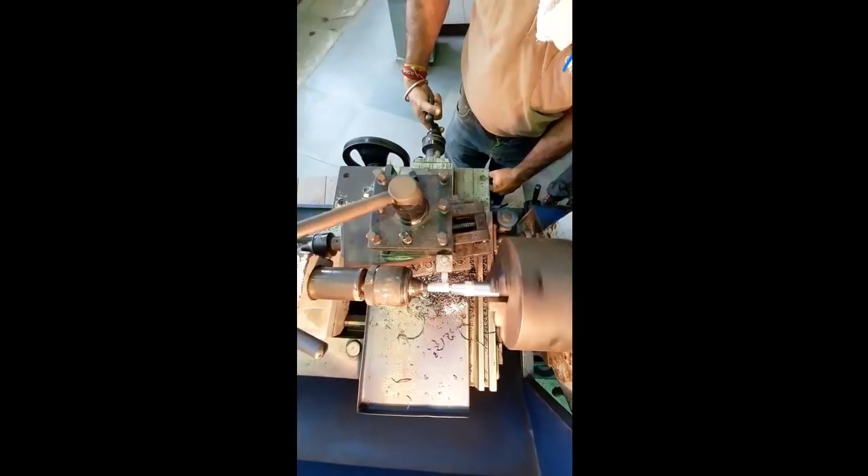You can see the threading has started, the chip is being removed and the impression is coming out. You can see very clearly, once it has been done, it is withdrawn, and the half nut mechanism is being disengaged. Again from 0.6 to...

The final pass is being done right now. The depth of cut is being given. The half nut mechanism is being engaged. Once it has been cut, withdraw.

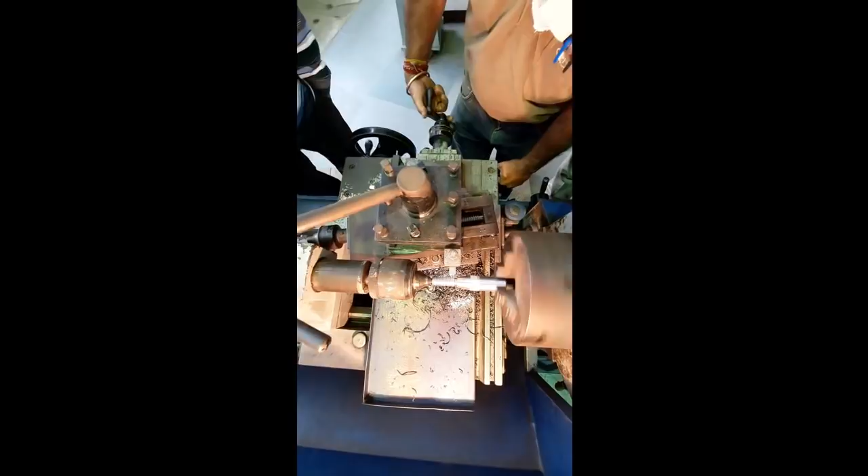Now we can see the thread has been done. The total job which was given has been completed. Now we stop the machine and take out the job. Now we can see the job diagram over here and the finished job is being shown. The raw job diameter which was provided has been transferred to the finished job.

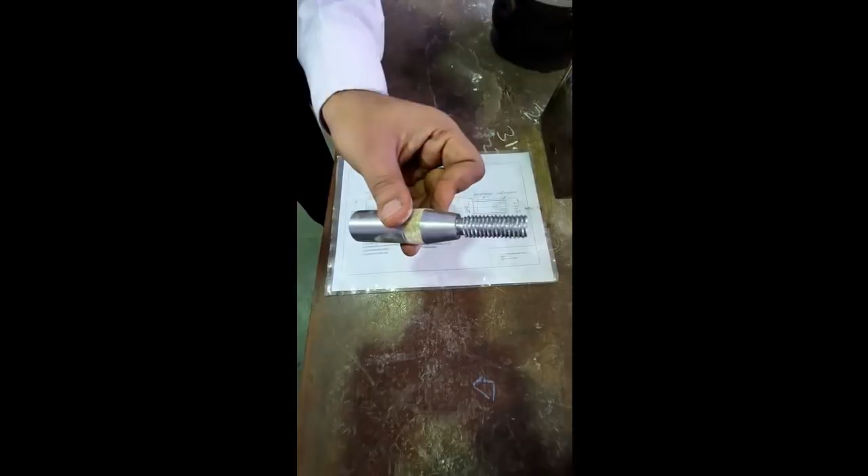You can see the threads over here. The threads look like this. This is the groove, taper turning, chamfering, facing, and centering on both ends. So the whole job is being done. Good luck to you all.